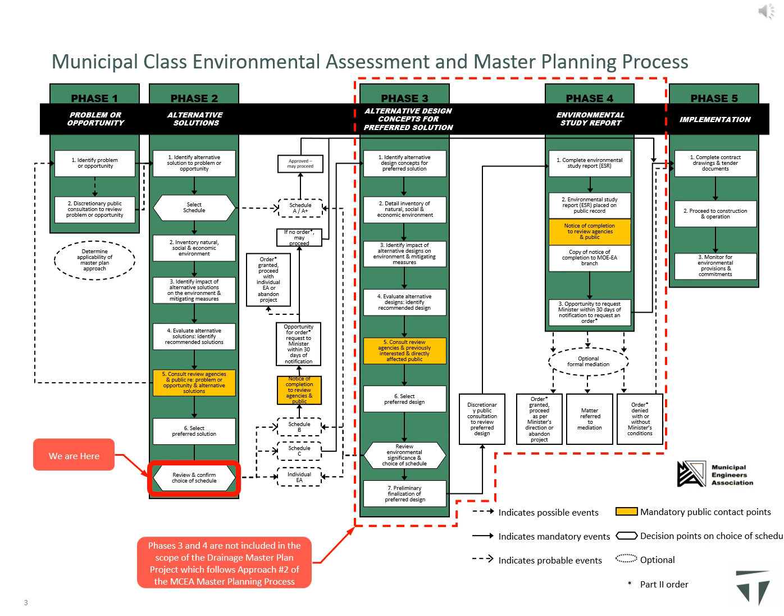This Drainage Master Plan is focused on developing drainage solutions for the settlement areas of the Town of the Blue Mountains, including Lora Bay, Thornbury, Clarksburg, Craigleith, Camperdown, and the Blue Mountain Village area. The study area covers the settlement areas from Christie Beach Road in the west to Grey Road 21 or Osler Bluff Road in the east. Georgian Bay forms the north study boundary, and the settlement area boundary generally forms the study's south limit.

As part of Phase 1 of the Municipal Class Environmental Assessment process, the problem statement for the Drainage Master Plan was developed. Specifically, the problem statement for the Drainage Master Plan is: identify drainage deficiencies and recommend solutions to improve the storm drainage systems across the Town of the Blue Mountains, in consideration of impacts to the natural, social, physical, cultural, and economic environments.

Town-wide minor and major drainage system models were created to identify the existing drainage deficiencies associated with the town's drainage infrastructure and the extent of the flooding along each watercourse in the study area. With an understanding of the drainage issues and deficiencies across the town, general improvement options, including storm sewer improvements, water quality improvements, flow reduction improvements, and conveyance capacity improvements, were then identified.

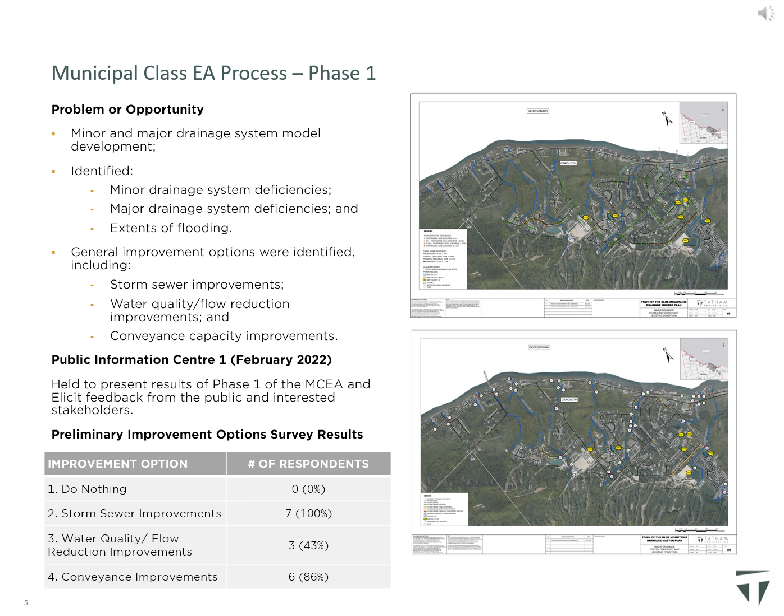As part of Phase 2 of the Drainage Master Plan, alternative solutions to address the identified drainage issues and deficiencies were developed, assessed, and evaluated. The alternative solutions were assessed using the minor and major drainage systems models created for the project to determine their effectiveness at addressing the identified drainage issues and deficiencies. The alternative solutions were then evaluated based on their physical, natural, social, cultural, and economic impact.

The alternative solutions having the greatest overall benefit were then identified as part of the preliminary preferred alternative solution. The preliminary preferred alternative solution included general recommendations consisting of minor drainage system improvements, water quality improvements, and operation and maintenance procedures, and individual drainage projects consisting of SWMF improvements, trunk storm sewer improvements, and culvert and watercourse improvements.

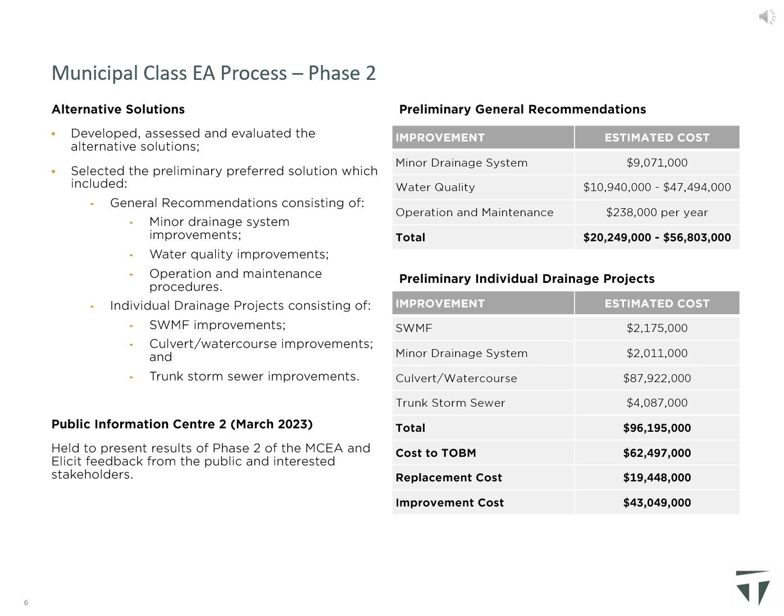Public Information Center 2 was held towards the end of Phase 2 of the Municipal Class Environmental Assessment process to inform the public and interested stakeholders of the preliminary preferred solution identified, to elicit feedback regarding the solutions selected, and to advise regarding next steps. The feedback from Public Information Center 2 was used to refine the preferred solution, and the comments received generally supported the improvements being recommended.

As mentioned, the feedback from Public Information Center 2 was used to refine the preferred solution selected. The final preferred solution recommended for implementation by the town is presented in the following slides.

Following the screening of improvement alternatives as previously described, general recommendations were identified for inclusion in the preliminary preferred solution. These general recommendations generally consist of Schedule A or A+ projects and are pre-approved for implementation at the town's discretion, as deemed feasible, in conjunction with planned infrastructure renewal and road reconstruction projects as infrastructure reaches the end of its service life. The following general recommendations were selected for inclusion in the preliminary preferred solution.

Minor drainage system improvements, including upsizing storm sewer to satisfy current design standards, relocating drainage infrastructure from private property to municipal lands, and improving areas currently absent of minor drainage systems to include storm sewers or roadside ditches as part of future road reconstruction projects.

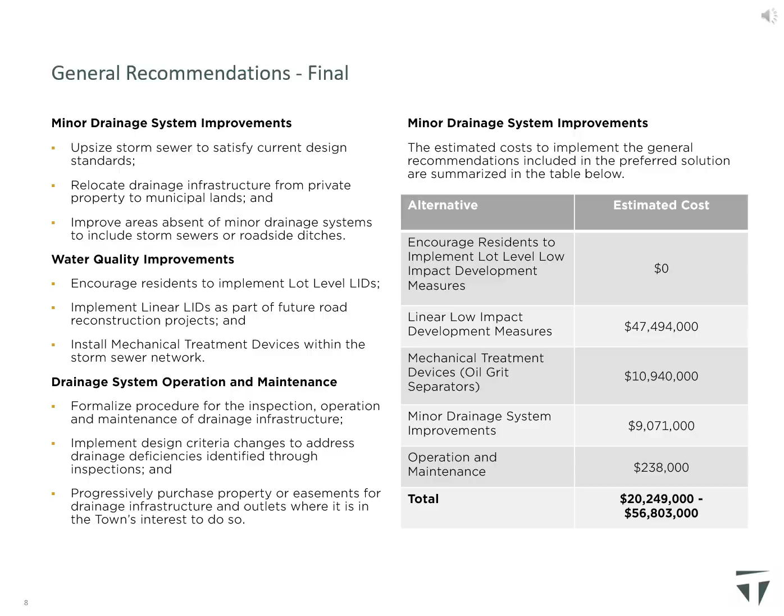The individual drainage projects recommended through the Drainage Master Plan include retrofitting an existing stormwater management pond, culvert and watercourse improvements, and trunk storm sewer improvements. The individual drainage projects recommended through the Drainage Master Plan are illustrated on individual drainage project maps included in the 90% Drainage Master Plan, included on the project webpage on the town's website.

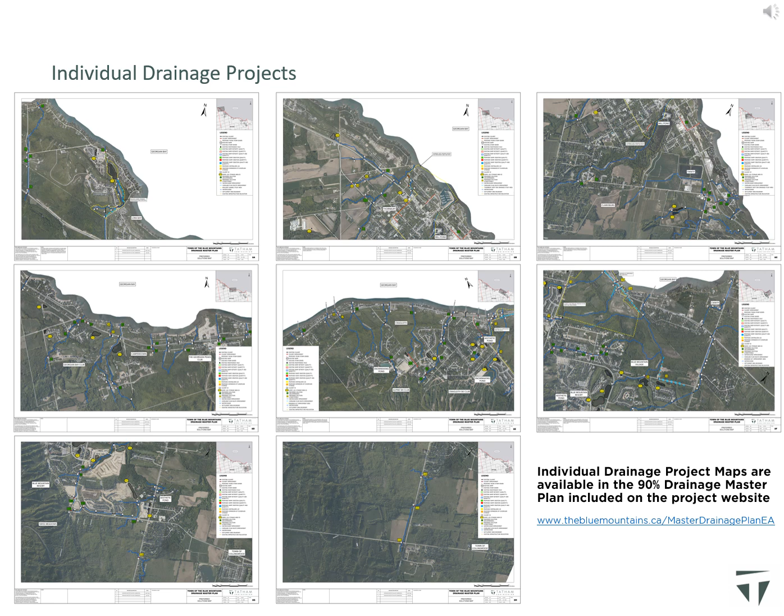The number and types of individual drainage projects evaluated and recommended, and the estimated costs of the recommended projects are summarized on this slide. A total of 79 individual drainage projects were selected for inclusion in the preferred solution. Of these 79 projects, there is one stormwater management facility retrofit for quality control, 2 specific minor drainage system improvement projects, 74 culvert and watercourse major drainage system improvement projects, and 2 trunk storm sewer and overland flow route major drainage system improvement projects.

The total cost of all of the recommended individual drainage improvement projects is estimated to be $97,768,000. However, some of the recommended drainage improvements fall under the responsibilities of the Municipality of Meaford, Grey County, and the MTO. The estimated cost to implement the recommended drainage projects, which are the responsibility of the Town of the Blue Mountains, is $67,864,000. Of this cost, an estimated $19,448,000 would be required to replace existing infrastructure at the current level of service, meaning the actual cost to the town to implement the recommended improvements is estimated to be $48,416,000.

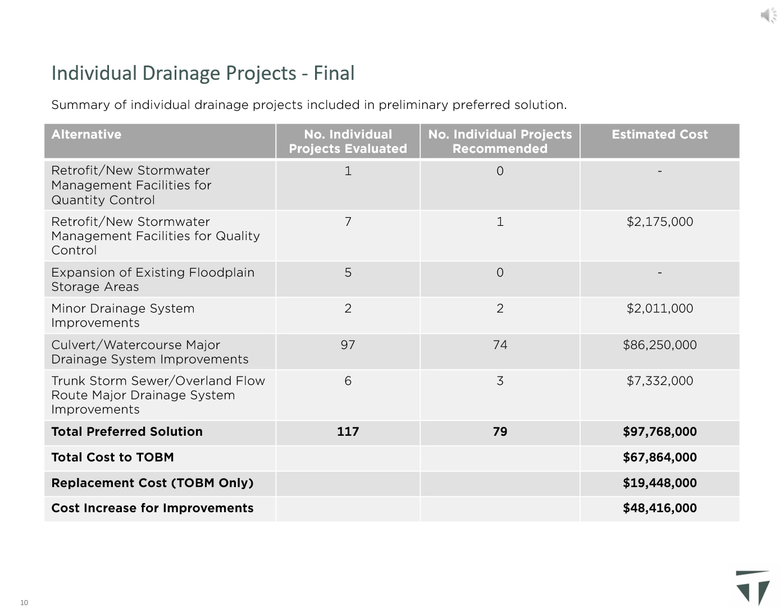We note that this estimated cost assumes that the drainage improvement projects will be constructed individually, while in reality there will be cost savings as some of the recommended drainage improvements can be completed during road construction and infrastructure renewal projects. Additionally, the town is calibrating the Drainage Master Plan models to improve model accuracy. The current models are conservative. They produce higher than anticipated peak flows, and we anticipate that model calibration will result in reduced peak flows, allowing for smaller infrastructure to be constructed at reduced costs to the town.

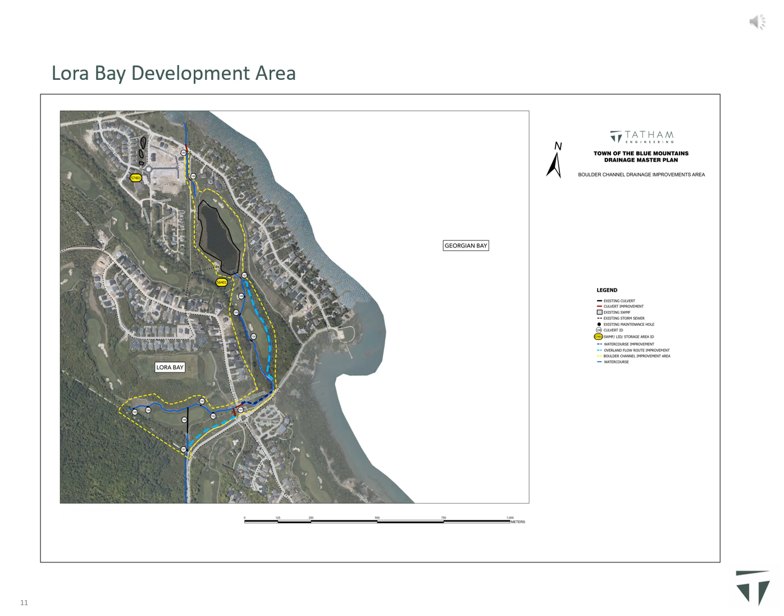In the Lora Bay development area, drainage improvements shown within the Boulder Channel Drainage Improvements area, outlined in yellow, were recommended as part of a site-specific study of the local drainage system. These improvements are currently being implemented by Lora Bay. If future drainage improvements are required for this area, they will be assessed and implemented by Lora Bay in accordance with site-specific studies in support of future development through the Master Development Agreement process.

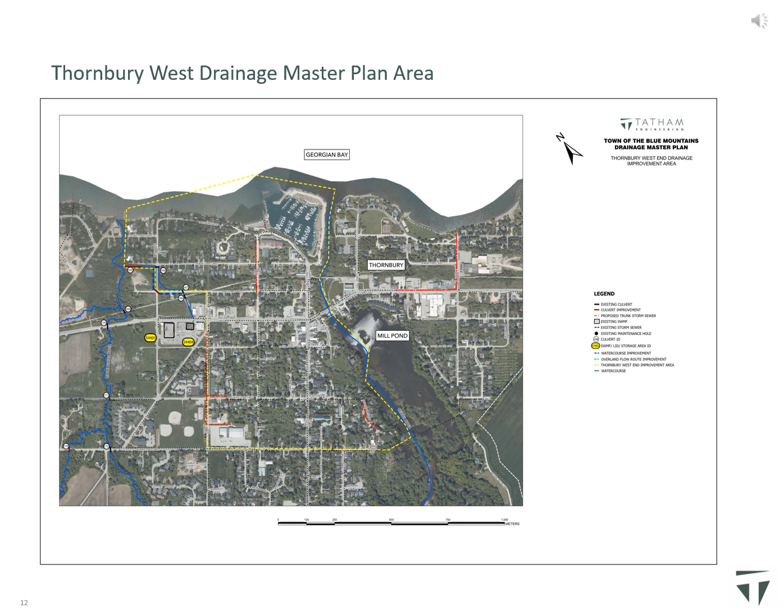Drainage improvements shown within the Thornbury West Drainage Master Plan area, outlined in yellow, were recommended as part of the Thornbury West Drainage Master Plan Municipal Class EA, completed by Tatham Engineering in 2019. The drainage improvements recommended by the 2019 Municipal Class EA were reviewed as part of this Drainage Master Plan and are recommended to be implemented as described in the 2019 Municipal Class EA. Some of these recommendations have been or are currently being implemented as part of the Thornbury West reconstruction project.

Conceptual designs of the drainage solutions proposed to be completed through the Drainage Act assessment have been prepared by Crozier Consulting Engineers and peer-reviewed by WT Infrastructure. WT Infrastructure also reviewed the proposed drainage improvements and the process for the Drainage Act project to ensure the proper process is followed in accordance with the petition for drainage works under the Drainage Act.

The proposed drainage solution involves improvements to existing municipal drains. Watercourse 7 in the study area is the Blue Mountain Outlet Drain. Outlet 8 is the Blue Mountain Diversion Drain. And Watercourse 9 in the study area is the Ford Outlet Drain. The proposed drainage solution includes the following works. An overflow channel will be constructed between the Georgian Trail and Lakeshore Road East to convey flow exceeding the capacity of Watercourse 9 from Watercourse 9 to Outlet 8.

An existing spill from Watercourse 7 towards Watercourse 6 will be eliminated, thereby incrementally improving flooding along Watercourse 6, and an overflow channel will be constructed along Watercourse 7 and Lakeshore Road to convey flow exceeding the capacity of Watercourse 7 from Watercourse 7 to Outlet 8, and the culverts crossing the Georgian Trail and Highway 26 along Outlet 8 will be improved to convey the additional flow directed to Outlet 8 by the proposed overflow channels.

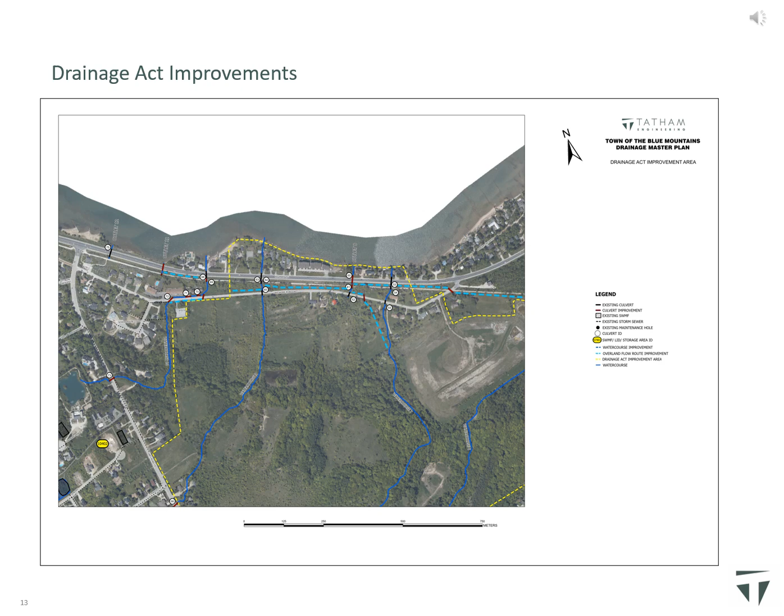Following the selection of the preferred solution, the individual drainage projects were prioritized through a risk assessment, considering other factors such as infrastructure condition and current capital plans. After prioritizing the individual drainage projects, a 10-year implementation plan was developed considering available budget. The implementation plan is outlined in the following slides.

The individual drainage projects were prioritized based on their cumulative risk, and prioritization of the projects was refined considering the condition of the existing infrastructure, works included in the current capital plan, and the need to implement projects starting downstream and moving upstream in the watershed.

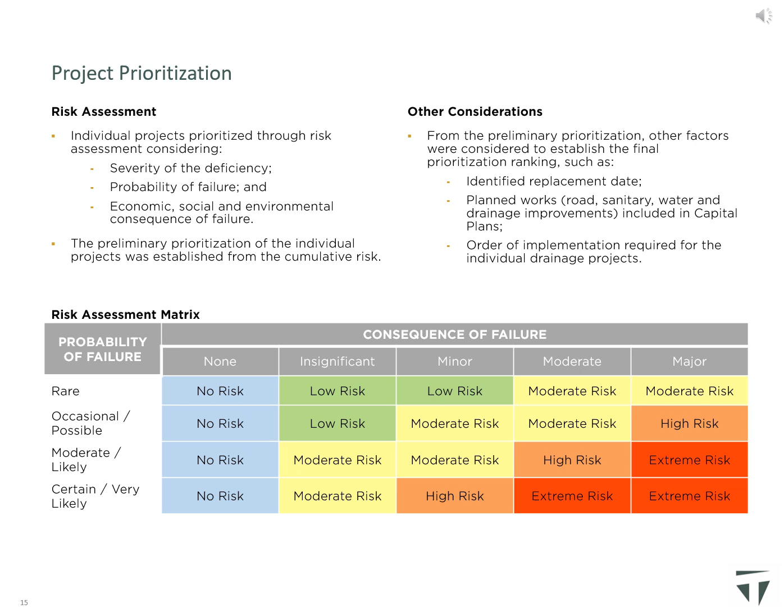or an average annual expenditure of $2,351,000. The town intends to undertake the recommended drainage improvements as per the 10-year implementation plan, subject to available funding and capital budget. As available funding sources are not guaranteed and the capital budget varies, the implementation plan is subject to change as part of future capital plan updates.

As part of the Drainage Master Plan, a development framework outlining the recommended approach and criteria for the design and approval of future development applications in the town from a drainage and stormwater management perspective has been prepared. The development framework includes a more rigorous methodology to establish water quantity control requirements for developments to control peak flows and prevent further erosion throughout the watershed, a means to identify where improvements to existing drainage infrastructure and/or watercourses

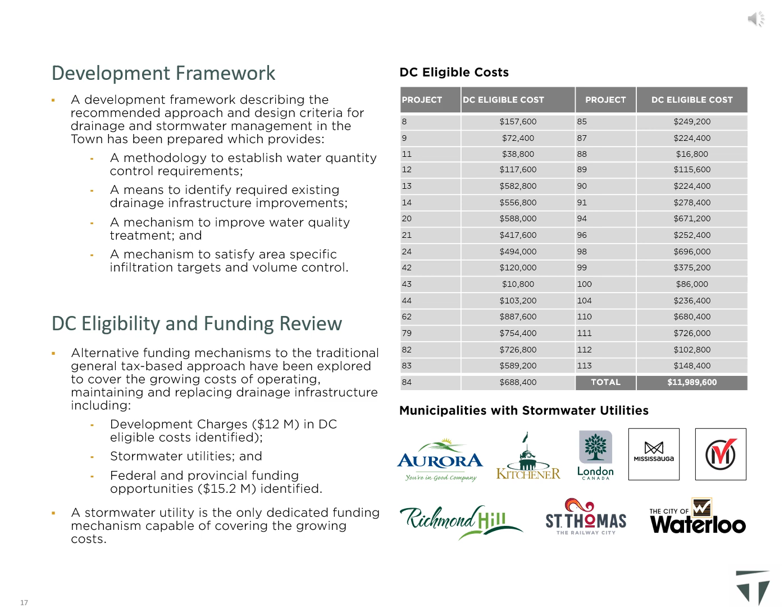Proactively, the Town of the Blue Mountains currently applies a simple approach to adapting to climate change by applying a 10% increase to the available rainfall intensity, duration, frequency (IDF) relationships developed from historic rainfall data for the area. As part of the Drainage Master Plan, a review of approaches currently used by municipalities to adjust their rainfall design standards to account for climate change has been completed.

Current climate change models predict a 4% to 10% increase in rainfall depth and intensity through the year 2050 and 2100, respectively. Based on the comparisons of the predicted future IDF curves from the various climate change prediction tools, the current Town of the Blue Mountains intensity duration frequency relationships adjusted by 10% to account for climate change are valid for infrastructure sizing through the planning horizon 2050 and potentially beyond.

It is recommended that the town reassess the 10% adjustment factor used to account for climate change when IDF curve updates are released, or at a minimum, as part of every design standard update, to ensure the town's design standards remain valid and properly account for climate change for the anticipated lifespan of the infrastructure being designed.